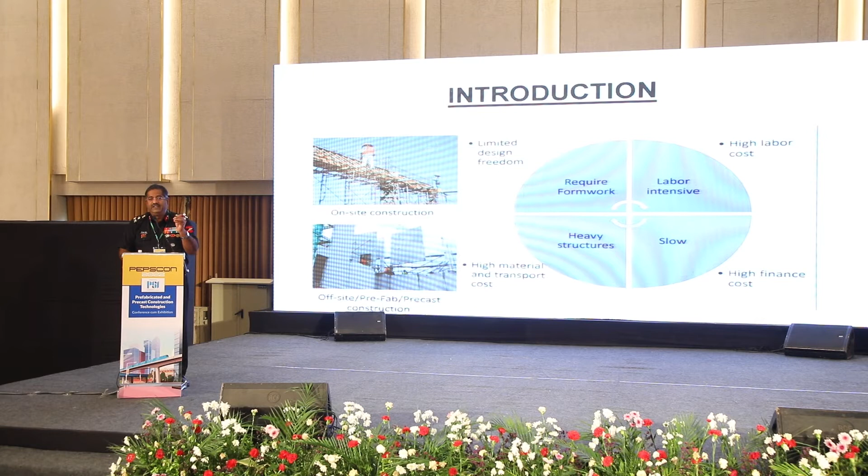Concurrent validity is very much necessary. Your eye has to tell you that what you are seeing is what you are seeing. There is no aberration. So therefore, there is a huge limited design freedom in normal construction, more in 3D.

High material and transport cost, less in 3D if planned well. If it is not planned well, if it is off-site production, because you've got a hermetically sealed environment with a huge crane and space and height and width, they bring it because if it's not strong in shear, it will break.

It has been transported very properly, and we have got normal hard floor vehicles. If you create vehicles like Kelvinator refrigerators, when they used to come to capture the market, they used to come with more adjustable shelves. Now they have gone for more frills, but I used to find it very good, because he was beating others hollow by giving me adjustability. So similarly, you need to create trucks for correct transportation.

You cannot simply stack all 3D modules one on top of another and move them, because to lift a module you would have created a slot, a crevasse, or turned the reinforcement so that you can handle it. Now if you simply stack it, they will all get damaged. The moment you unload it, many of them will get cracked, and if you simply plaster over it, the crack won't be visible.

According to me, the issuance into action is more important. Close monitoring enables them to enable you. So high finance cost, high labor cost, all this will be economies of scale. If you make only one or two buildings, it's not going to be a fighting issue, but if you are going to make more, my friend, it could all go down somewhere.

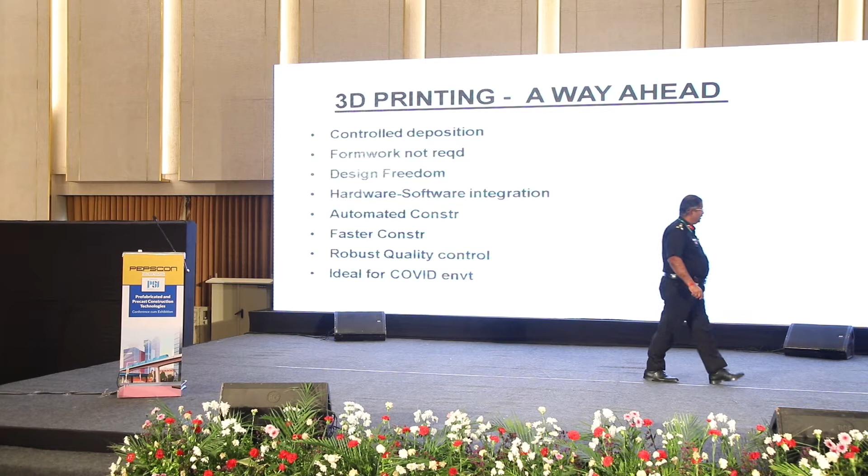So ladies and gentlemen, design freedom is available because architects are dreamers, I told you. So they want beautiful things to come up. Design freedom will help you to do that.

Hardware, software integration, because what has been planned is being issued with perfect precision. When you bring the module to the site, if you fit it this way instead of that way, everything is gone, because that precision lends itself to precision when applied on site with precision. Otherwise, you have produced it with precision and laid it with imprecision.

I am trying to make things appear simple. Life is simple. It is not Schwarzenegger's theorem every day. It is simple. Simple things actually become major when applied correctly.

Coming to automated construction, you can have a machine on site or off site. Off site gives more economies of scale, good transportation, not much lead time, becomes efficient. On site, now in Netherlands, they are building G+4, G+3 with huge machines on site, which is also good.

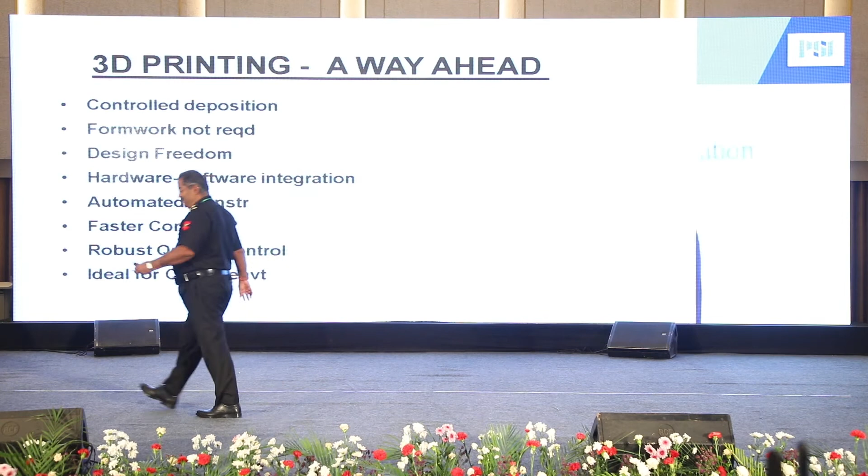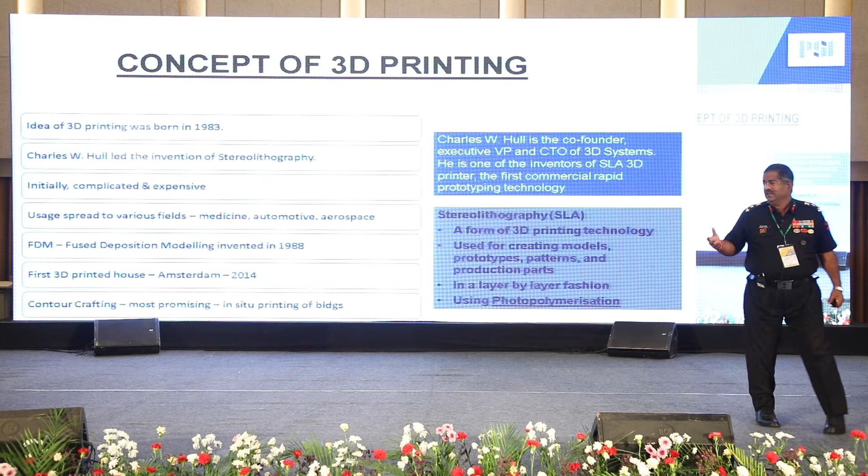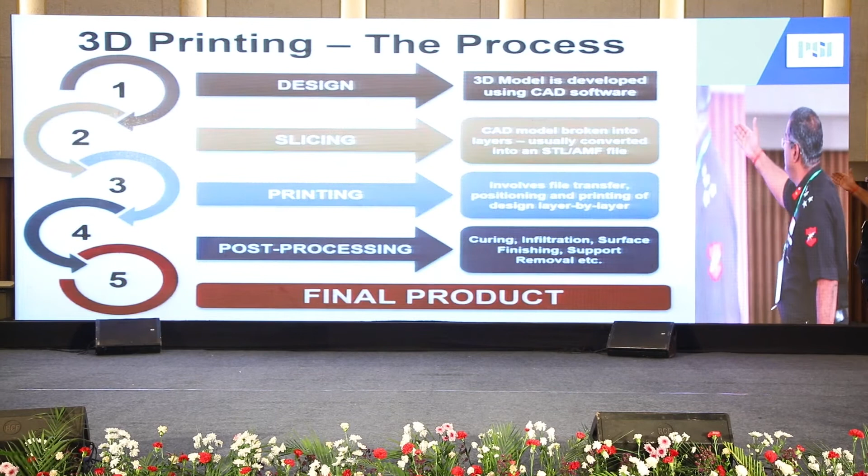Charles Hull, he was the one who pioneered this initially. So in a number of processes, you can see fused deposition modeling and others: design, slicing, printing, post-processing. In the design, models came up broken into layers, so you can name them A1, A2, Alpha 3, Zulu 4, and so on. Break them into pieces, take them, and join them.

God has given you a natural sense of symmetry - one ear is here, one ear is here. So you don't need tremendous fundamentals to apply on ground; you have to sensibly apply where this module was supposed to be, here or here. Where is the mirror image coming? So it cannot simply be on paper and you fix the module.

Once you fix it, you can't remove it. How are you going to fix it? Like when fixing granite, they used to apply a paste to affix it - similarly, one module onto another module is going to come up, so that there is immediate traction.

So precise initial positioning is necessary, and imprecision at one place is enough to spoil the whole building. Eccentricity will get transported.

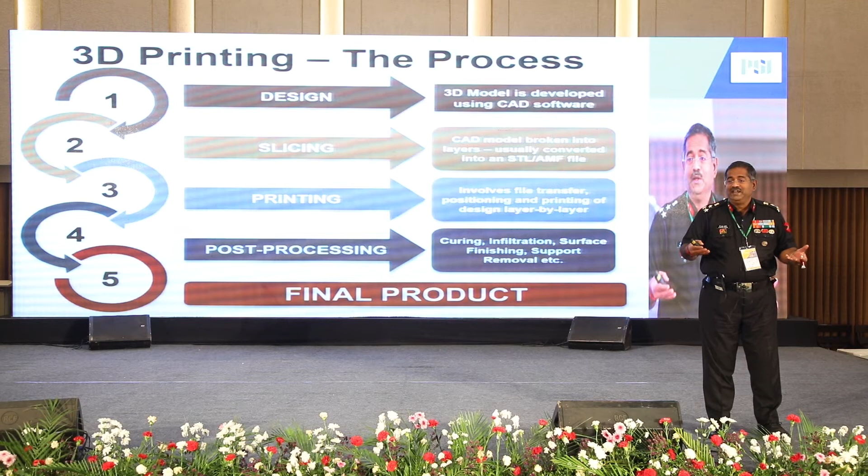Coming to printing, post-processing and curing will take some amount of calculation, and the traditional methodologies cannot be left sight of. Full strength will be attained at a particular place and time, but there is a workable strength you are supposed to reach before you work ahead. Coming to manufacturing applications, medical, there are so many applications available.

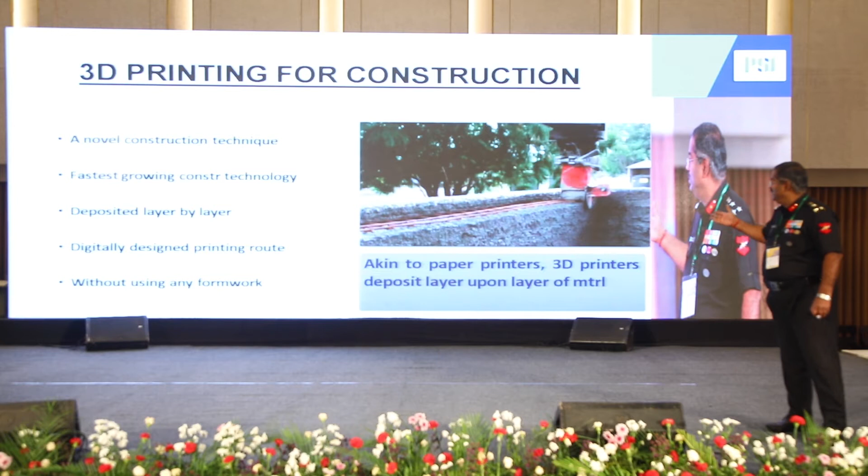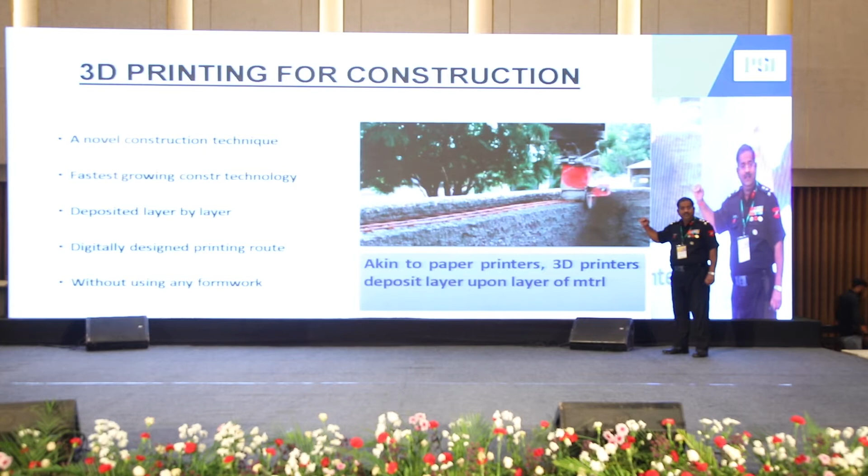A novel construction technique, layer by layer. Now look what is happening here. When you are going layer by layer, you shouldn't have voids. You shouldn't have honeycombing, and all these are concepts we are talking about.

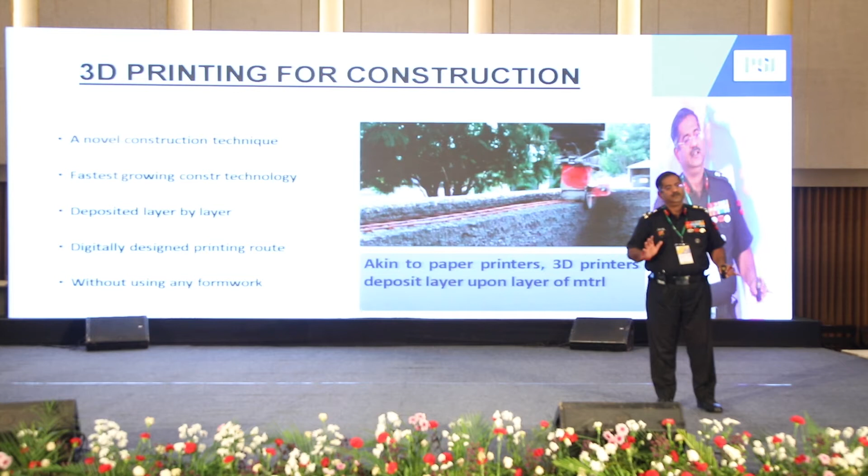Practically at site, if you are launching 3D printing, a senior man should be there continuously. Off site means somebody should be there to certify each module. My idea is to make an RFID stamp, digitally signed by a quality controller, which he affixes on each module, made with steel so it remains part of it.

So what has happened? Any day, historically, even if he has become Shah Jahan and gone to Jannat, he can be told what happened to the module he made. Because we engineers have got a beautiful responsibility of being responsible ad nauseam forever.

Canal House in Amsterdam, a house printed by a WinSun company in China, a 5-story building, to give you a variety. First 3D printed office, Tvasta 3D printed, this is in IIT Chennai. So I met Professor Manu Santhanam in IIT Chennai. Why are these IIT professors important?

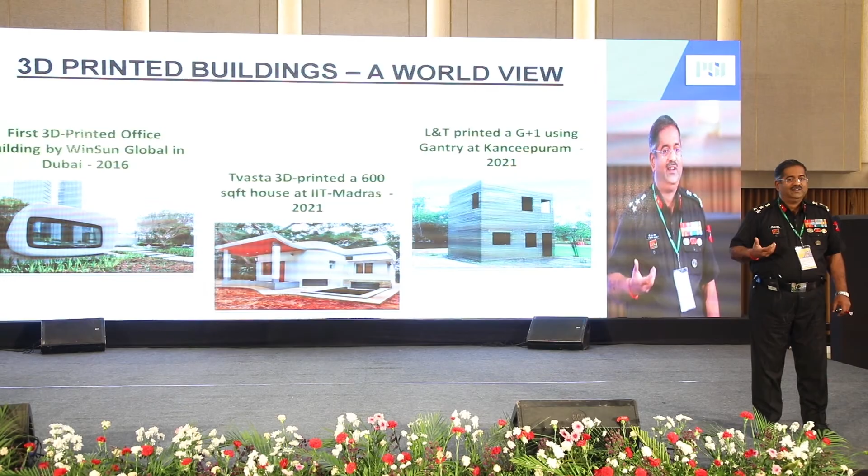They are incubators. They are incubators of idea. They are incubators of belief. They are incubators of execution, to an extent that they say if you believe in an idea rightly, when it issues out into action, definitely something can come out of it.

So whenever you adapt a technology, go to the source professor. He will tell you the larger macros, then reach the startup. Am I right, sir? It will allow you to bridge between the academia and execution. Otherwise, one arm will start blaming the other.

And gentlemen, when you accept a technology, accept ownership in toto, so that you are able to implement it in toto. Otherwise what will happen? Okay, I have taken up this technology, let me try it - that is disaster.

Secondly, when a technology is going wonky in between, adapt another technology to bridge it.

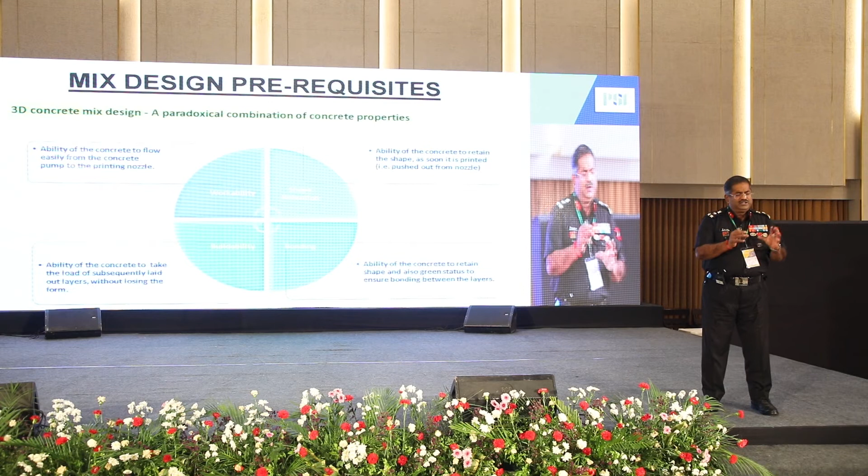So, ability of the concrete to flow easily. Now they will say I have a mixture and formula because of which it will flow properly. Accept it, because we are in a gestation period. If the startup says I have a formula, accept it. But tell the startup, keep the formula up your sleeve, but I want the structure to be proven in destructive and non-destructive testing. Get it tested, get it verified in lab, and move ahead. Don't fight with him to share or declare the formula, because then what will be left with him in terms of motivation? So, otherwise, come to the next one.

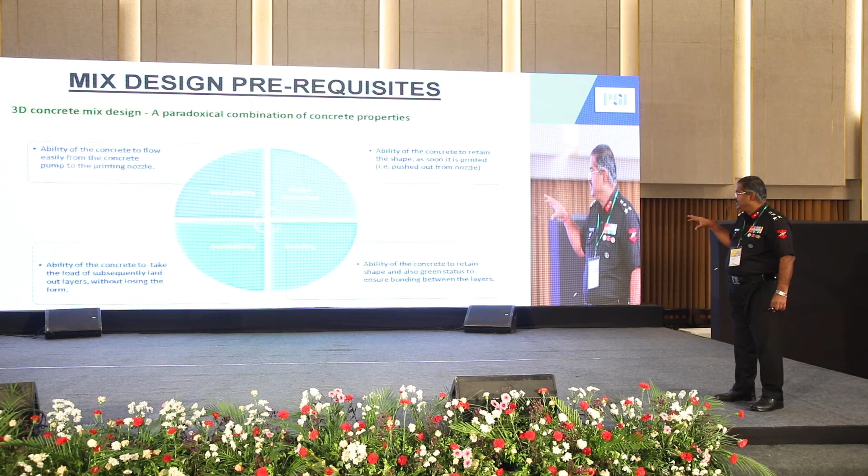Ability of the concrete to take the load of subsequently laid out layers. Always go visit. When I wanted to start off, I went to Chennai, I saw the only building they had made.

I saw it from every angle. I got convinced, then I came and started. So convince yourself by seeing a prototype somewhere, or else create a prototype in a small fashion.

I am now constructing, my organization consisting of 19 executive engineers and 6 superintending engineers. We constructed the Pune runway against time.

We got a small closure period and we finished it in 11 days. So today I read in the newspaper that they have completed the Ahmedabad runway in 75 days, record time. So then I was thinking that no, probably ours was a better record. No, that is a wrong comparison, because apples and oranges can't be compared.

We don't know what were the factors involved in the Ahmedabad runway, what was the expanse, what were the layers. We don't know what was there with them, they don't know what was there with us. But then, in each little ecosystem, each little microcosm, we can ourselves determine whether we are doing well or bad.

In that extent, I can tell you, we did the Pune runway, we did the Bhuj runway, finished them in time. Now we are doing the Jamnagar runway, in which we are going good. So yesterday I was supposed to go in for DAC2.

What is it, Mrs. Sarvesh? Dense asphaltic concrete, the second layer, which is supposed to be a little superior than the lower layer. So for that, we finished validation yesterday night at 12 o'clock.

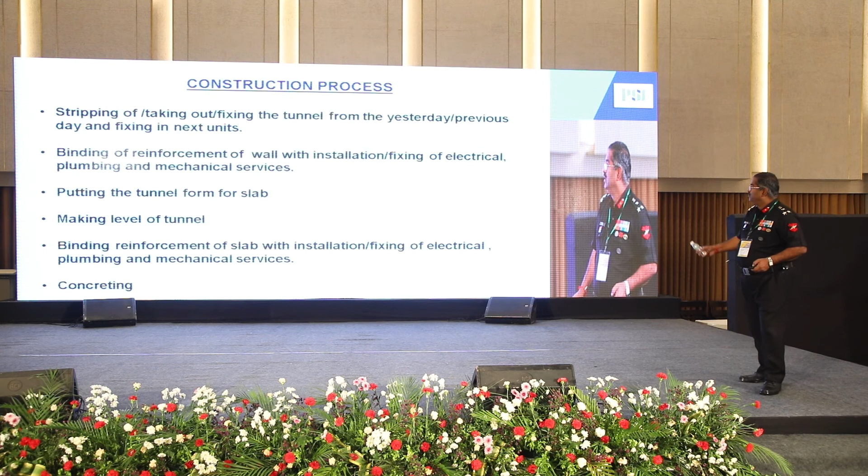So now I have explained the process - monolithic concrete construction system - because it makes a shear wall like Mivan. There is not much difference in the concept. Putting the tunnel form for slab, making the level of the tunnel more important, facilitates rapid construction, economies of scale.

MS plate 3 to 6, tie rod, vertical jacks - all you need, roller plates you need, kickers, above the plinth beam, from ground floor to any floor. So in Rajkot, 13 to 14 floor structures are being made.

When the Prime Minister got together lighthouse technologies, look at his vision. He said that rather than thrusting it down the throat of everybody that they will use it, let these lighthouse technologies come up at 6 places in the country. Let them become an example for people to go and see and do. So in Rajkot, tunnel form is being constructed.

Want to see 3D, come to me. Want to see tunnel form, go to Rajkot. It is being efficiently done there.

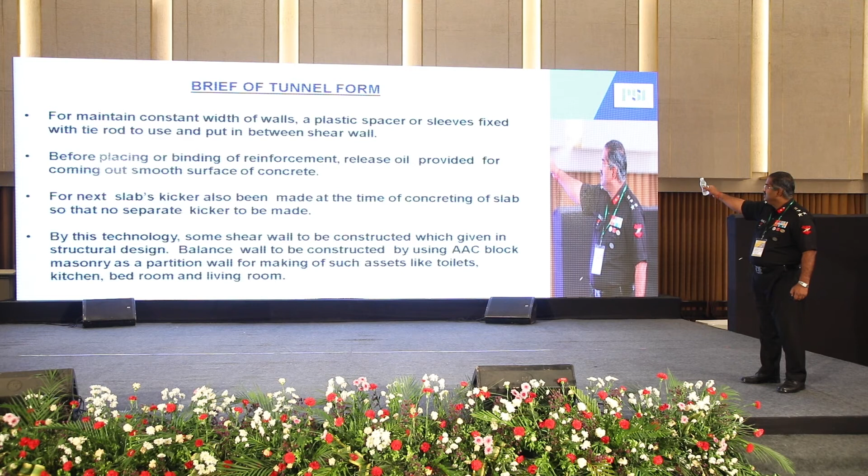Then according to the size and shapes of rooms, I explained to you. So maintain constant width, spacers. Many times you would have seen the old contractor at site manufacturing spacers.

Spacers are so important. Many times we will say, sir, all the spacer is used up, only 4 remain - and those 4 are the problem. You have to have a preponderance of smaller accessories if you have to be technically correct.

So the shear wall to be constructed will come up - where all you can use, you have seen. Construction process, I told you - lift it up. Here you can see what I had exactly told you.

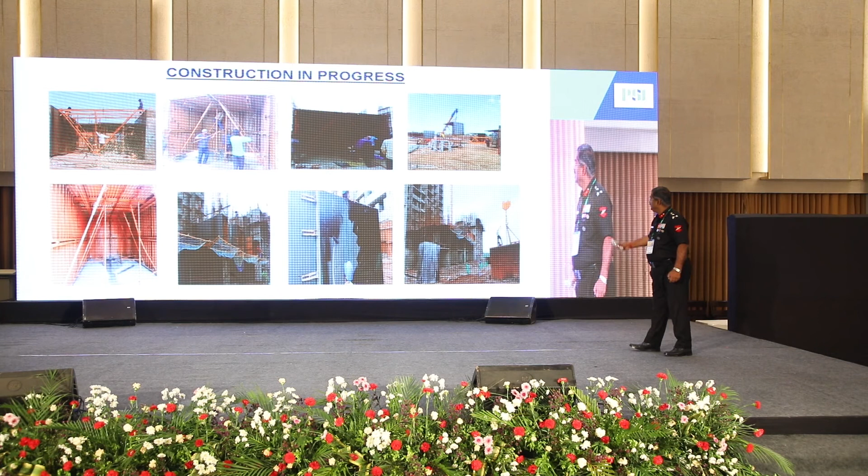Top face, long side face, short side face. So now they will be brought, you will use all props, fix it at site. Exact alignment is all that is going to be important. Position of doors, windows, conduits, recesses, spaces, plugins - they all have to be pre-decided and perfectly decided. Plumbing and sanitary fixings, plastic sleeves - simple.

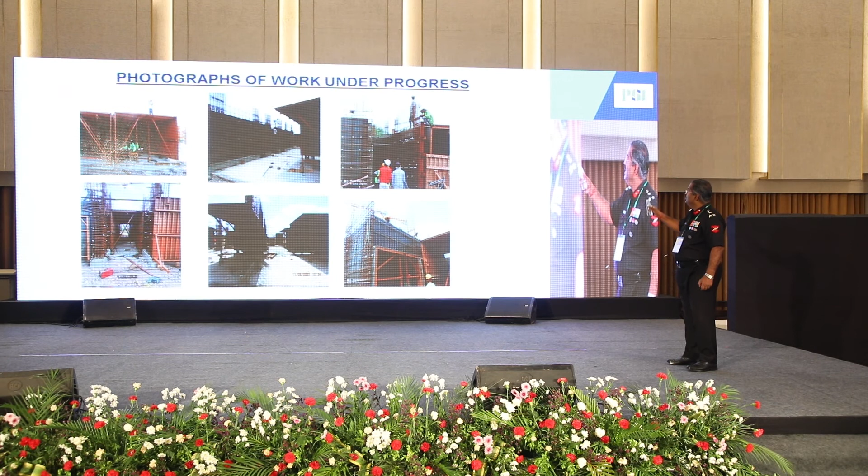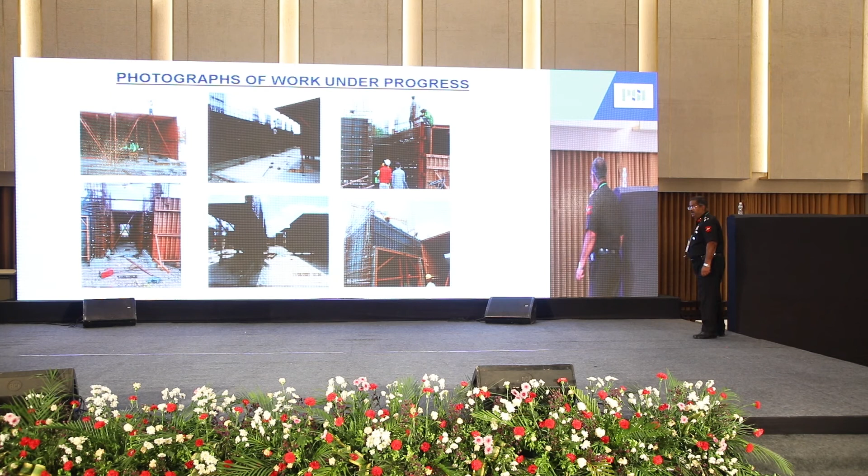You can make photographs of the works under progress. You can see, it will give you some idea. It's all about agitators, vibrators, curing - these are all small things, most important in this kind of structures.

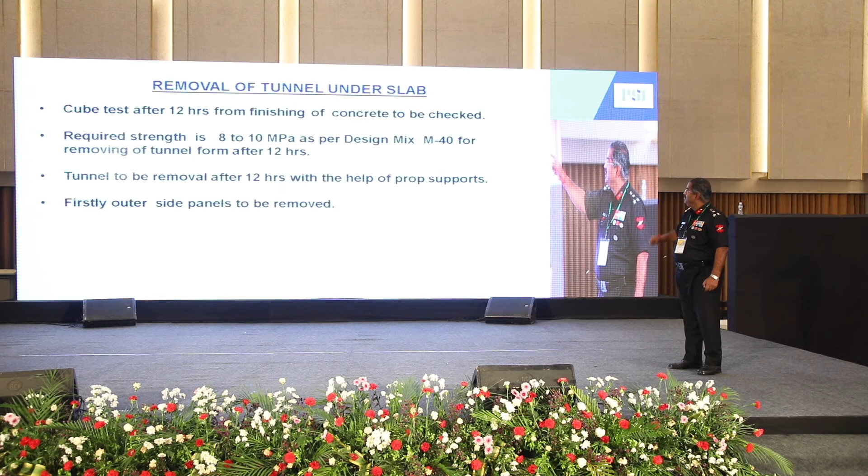Coming to the finishes, required strength 8 to 10 MPa for 12 hours. Tunnel to be removed after 12 hours with help of prop supports. I gave you 24 hours, that is safer.

Professor sir, you will appreciate 24 minimum. This 12 is a costly philosophy. Take it from me, look at a 24 hour cycle - foolproof, better.

This kind of structures are coming up. And advantages, disadvantages of Mivan construction - in the next 4 minutes, I will be able to associate you with the benefits of Mivan.

Industry is already inviting a number of variations. High quality concrete finish gets produced, I told you - can be done without plastering. Cast in situ concrete walls and slabs. So what happens? Staircase - we used to make staircase in 3 parts.

Whereas here, it is all already given in shuttering, so the high flow concrete is just filling it up and coming up.

Aluminium formwork is a temporary mold, a brand name from Europe, being used by a Malaysian company. Speed, strength, safety - safety because there are mezzanine kind of structures in between where people can stand and work. You are supposed to use harnesses, and everybody will be with a helmet. Inside the rooms, there are holes through which you can pass the shutterings to the next room.

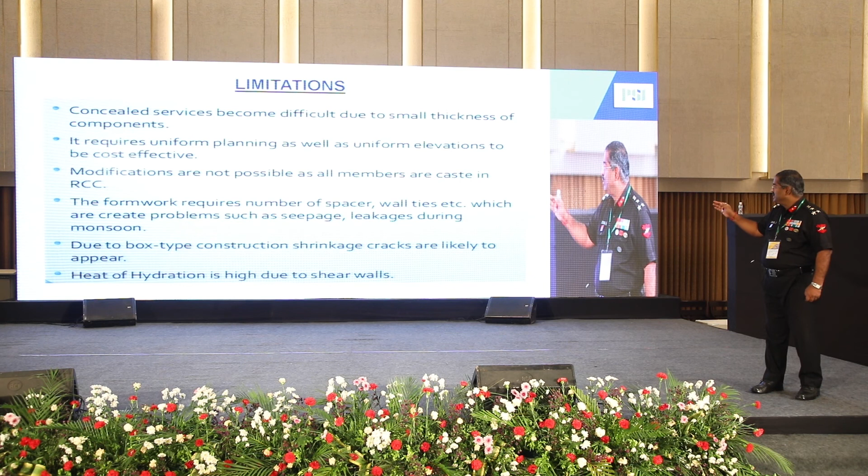Due to box type construction, shrinkage cracks can occur. So you have to use some admixtures for that, and there are desi methodologies for that.

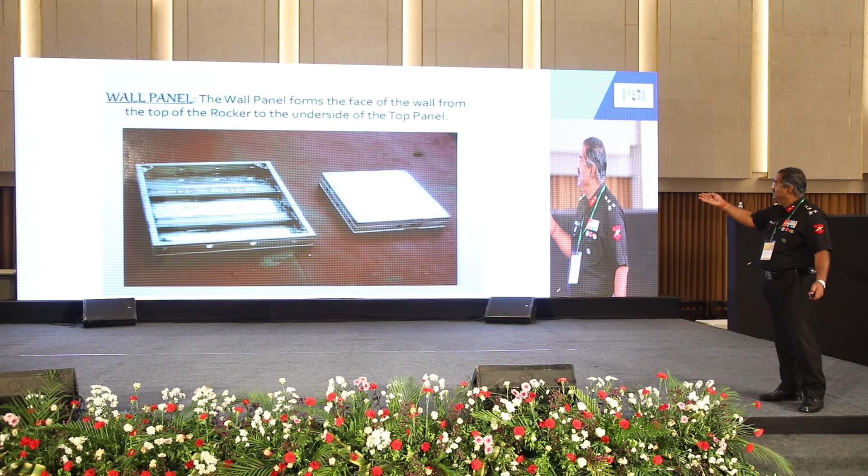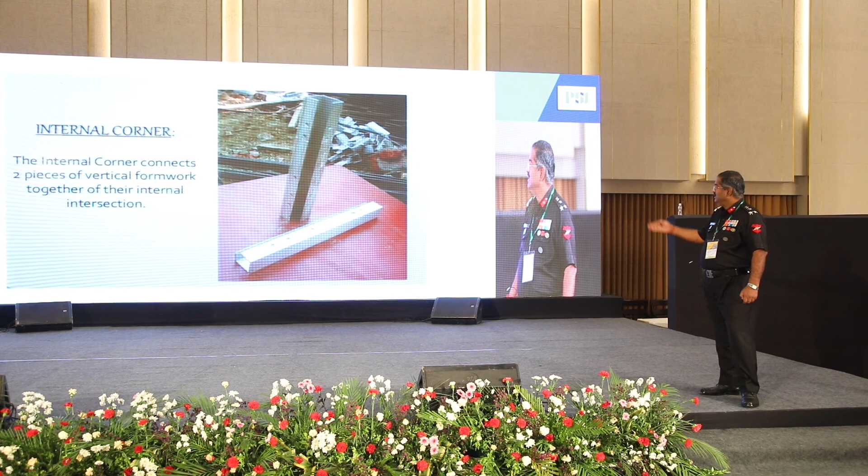Wall panel, this is a part. You will use rockers, you will use kicker - which I told you to make the kicker platform to keep the beam soffit, below which the bulkhead will come. You will use deck components, internal soft corners for correctness - just see how it comes up. You will use props of varying length. If ever you have a doubt about whether there is strength here or not, get 10 bamboo or Civil-Plex props sent from the site and put them up. Don't just say this set came with only this many props - no, he might not have given it that thought, and somewhere you have consumed more. So always ensure that you err on the positive side.

Sir, I kept your time. Ladies and gentlemen, I have finished.

My effort was to correlate you with rapid construction technologies. I think I have done some justice. If I have taken too much time, I am sorry - I am not too professional a lecture deliverer. During the tea we will discuss.